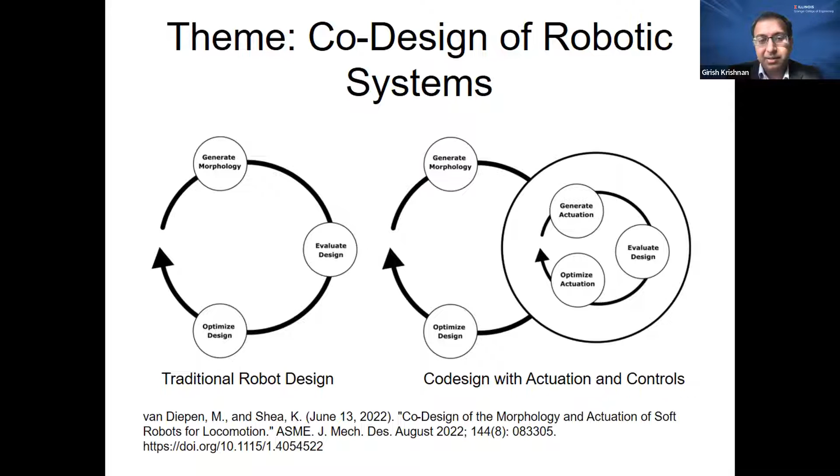Thank you, Girish. So we have four presentations, based on papers published in the 2022 and 2023 issues of JMD. The first presentation is on the novel design of a rotation center auto-matched ankle rehabilitation exoskeleton.

With decoupled control capacity, presented by Dr. Tan Wang. Dr. Wang received his BSc and MSc from China and his PhD from King's College London. In fact, he just completed his PhD very recently, so congratulations, Dr. Wang. His research interests include rehabilitation robots, reconfigurable mechanisms, and multi-finger dexterous robotic hands.

Thank you for the introduction of my background, Professor Leila. Then I will introduce my work. First I will share my screen.

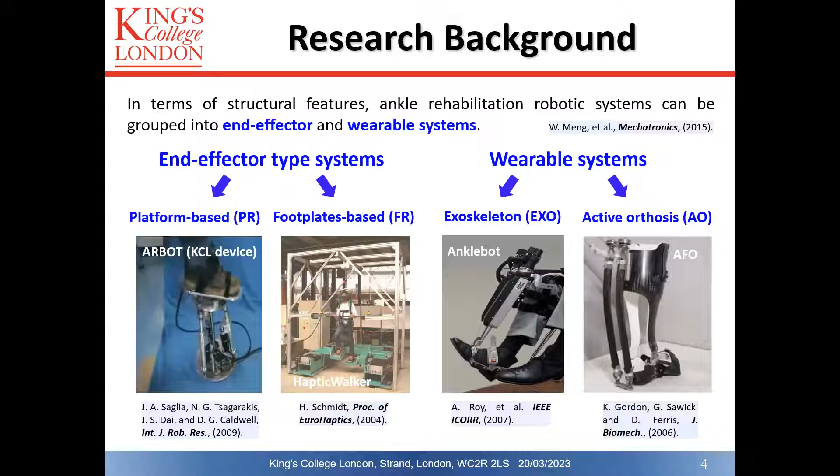These mechanisms are developed for different rehabilitation phases, which mainly include preliminary or early, intermediate, and advanced functional rehabilitation stages. In the initial phase, passive and active exercises are needed to promote patients to restore ROM and strengthen weakened muscles. Proprioception or intermediate exercises initiate after patients achieve a certain weight support capacity and aim to help them recover balance and posture control. The two stages share a common feature: they can be completed where patients are resting in a fixed position, which does not entail locomotion. Therefore, the two phases can be defined as a stationary rehabilitation stage. Comparatively, the advanced stage focuses on maintaining balance by controlling the ankle torques during walking and assisting patients to gradually regain and improve independent walking abilities. Hence, this stage can be defined as a dynamic rehabilitation stage.

Our initial target is to design a reconfigurable ankle rehabilitation device that can provide both stationary and dynamic rehabilitation exercises. We have published the design details in this paper. Today, the paper I will introduce is mainly about an analysis of the dynamic rehabilitation configuration of this reconfigurable design.

In designing such an ankle rehabilitation device, the mechanism center is required to match that of the ankle-foot complex, since misalignment may lead to discomfort, pain, or even secondary injury to the biological joint. Conventionally, in existing designs, the ankle-foot complex is usually reduced as a two-axis rotation model or a 3-axis rotation model. The 2-axis rotation model is adapted from the skeletal structure of the ankle-foot complex and comprises 2 serial revolute joints. However, because of individual differences, it is not possible to provide a unified 2-axis rotation model.

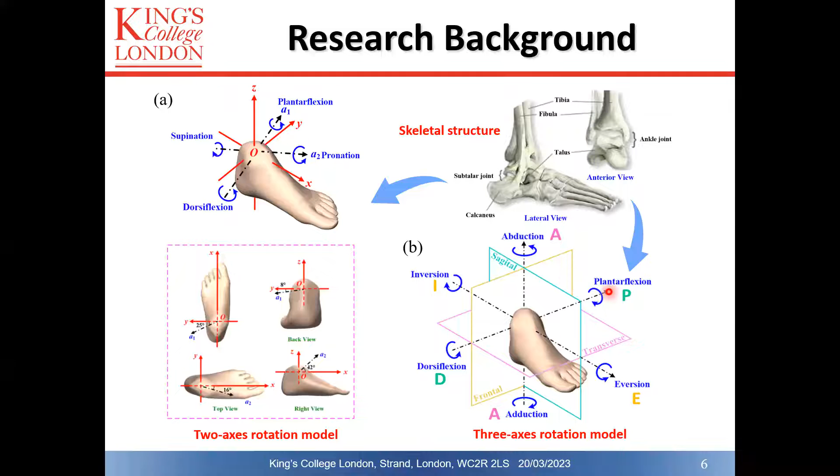In comparison, the 3-axis model is proposed based on motion features of the ankle-foot complex. It is virtually a spherical joint and can describe 3 rotations of the ankle, which are DP, IE, and AA. It is also the model I adopt in the design.

This slide shows the architecture of the design. Apart from the brace and the foot plate, it comprises 2 drive links, L1 and L2, which respectively have a UPU and SPU configuration. In the basic geometry, Ai here represents the connection points of the brace and the actuators. The lower connection points of the 2 actuator links to the foot plate are marked Bi. Point O here represents the ankle-foot complex.

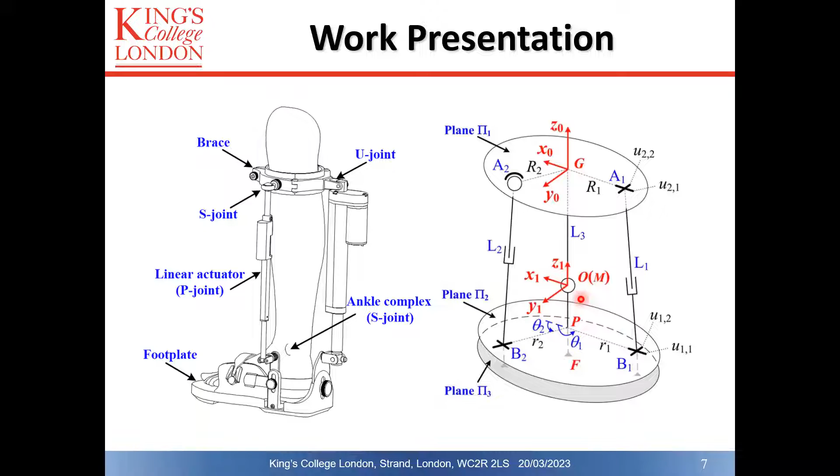Then, for an arbitrary configuration of the mechanism, we can derive constraint screw systems of link L1 and L3. Through reciprocal calculations, we can further get the foot plate's motion screws. Then the motion features of the mechanism can be summarized.

Firstly, the mechanism's rotation axis passes through the complex center. Secondly, in poses where U11 and U21 here - this is U11 and here is U21. When the 2 axes have an intersection, we can determine 2 rotation axes, A1 and A2. As shown in this figure, A1 is coincident with the line CO, and A2 is a normal of plane A1, B1, PG.

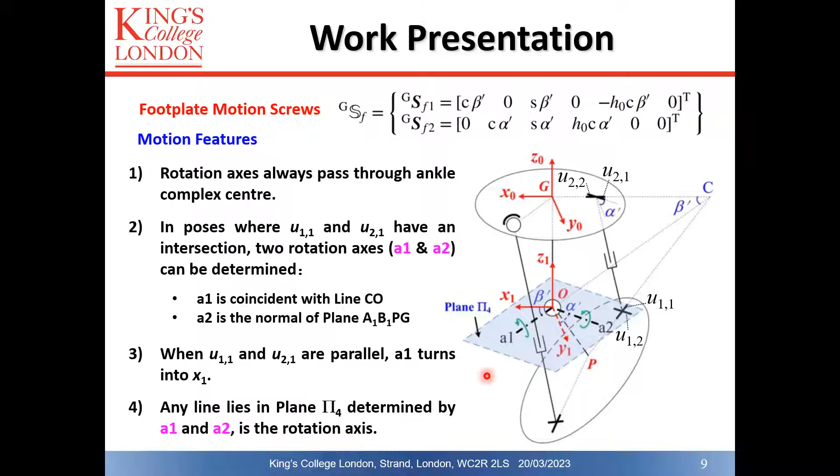In another case, when U11 and U21 are parallel, A1 will turn into X1. In addition, we can conclude that any line in plane Pi4, determined by A1 and A2, is a rotation axis of this mechanism.

Then, based on the analysis above, we can determine the rotation matrix of the mechanism. In this expression, alpha and beta respectively represent the rotation angle about X1 and A2. In the expression, alpha-prime here is the unknown quantity, which can be further determined from the forward analysis of the mechanism.

As shown in these figures, 2 different cases can be classified. In case 1, Bi are not at the same height as O, and in case 2, Bi are at the same height as O. After analysis, we can get the specific expression of alpha-prime in different cases. This formula shows the specific expressions.

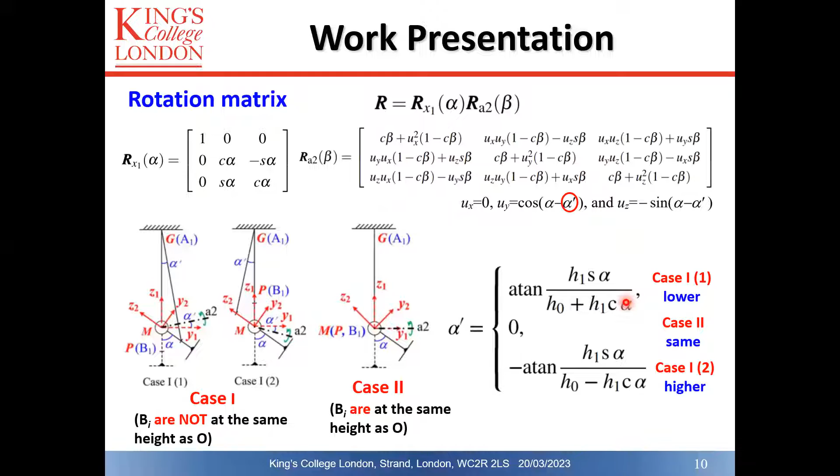After we determine the rotation matrix, the rotation of the foot plate can also be described by Euler angles about axes of the global frame, which are denoted alpha0, beta0, and gamma0. These 3 angles also indicate the IE, DP, and AA motions respectively. Then we can find the relations between alpha, beta, and alpha0, beta0, gamma0. The specific relations are displayed here.

Further, we can find that in case 1, if alpha and beta are non-zero, the mechanism will generate a compound AA motion, which means that gamma0 in these cases will not be 0. Also, the larger the value of H1, the larger the maximum value of gamma0.

As a comparison, case 2 will not generate the composed AA motion, no matter how alpha and beta change, and in this case alpha equals alpha 0, beta equals beta 0. Existing investigations show that AA motion has marginal contributions to gait rehabilitation, although the maximum values of gamma 0 in case 1 are not large. So case 2 is more suitable for dynamic rehabilitation. Therefore, the following analysis will focus on case 2 to fully illustrate its superior performance in other aspects.

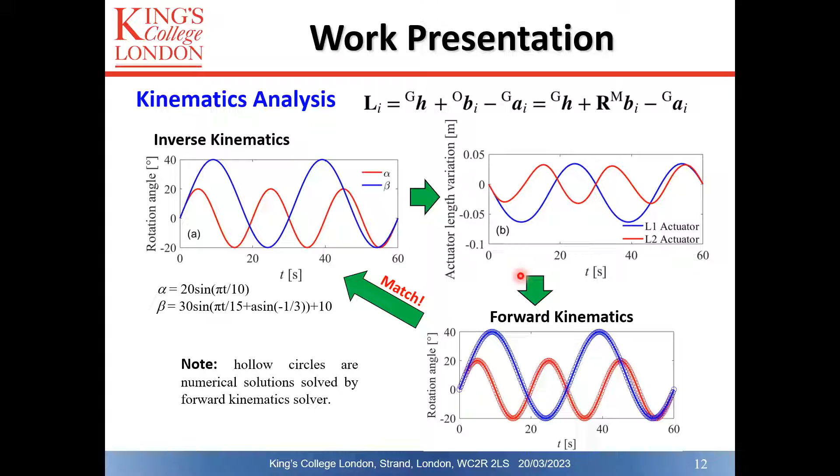In addition, via kinematics analysis, we can also find that the mechanism has a decoupled control capacity. From this animation, we can see this feature. The IE motion can be individually controlled by this link, L2. For individual DP motion, it can be individually controlled by the L1 link. So this animation shows its decoupled control capacity.

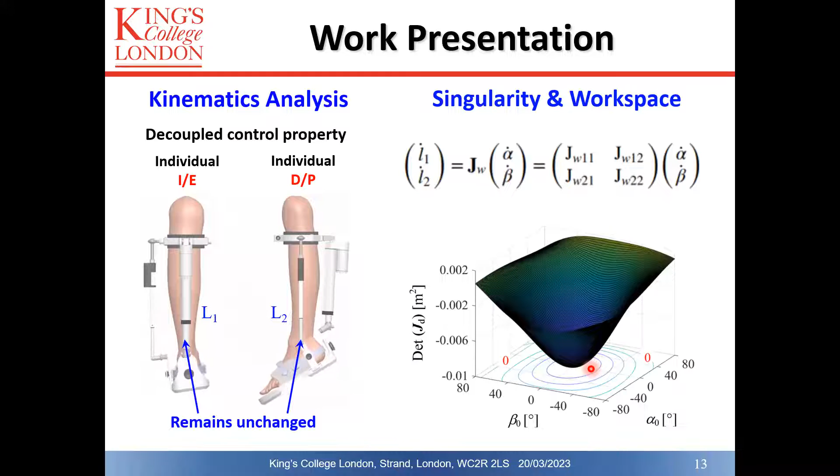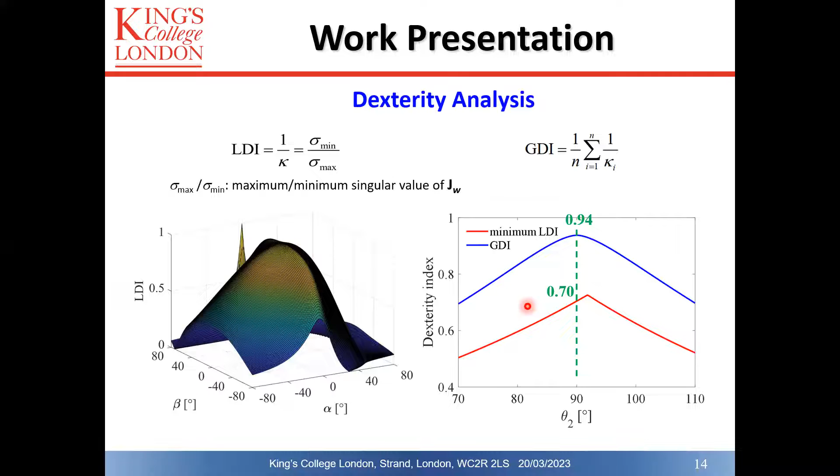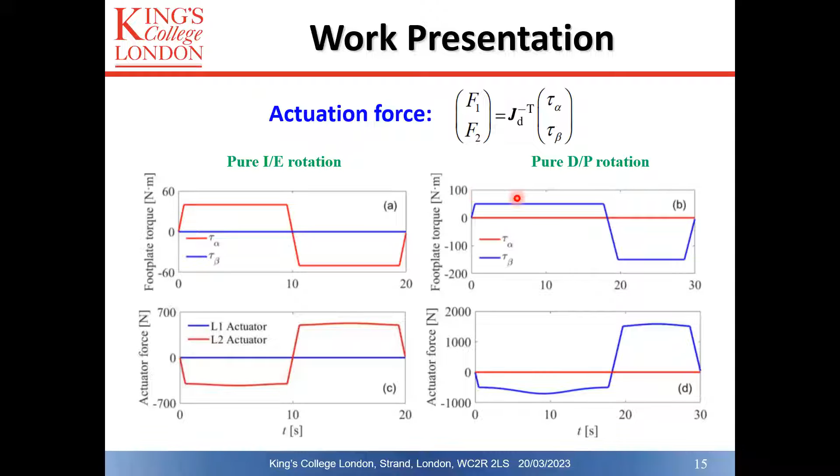Then we evaluated the actuation requirements. First, the actuation force, which can be calculated via this equation. In the calculations, to obtain a conservative estimate, extreme cases are considered, where the ankle torques are most consistently kept as boundary values. Then the actuation velocity can be evaluated by this equation. Based on the aforementioned analysis, it is possible to find suitable commercial actuators that can potentially be used to construct the exoskeleton.

The exoskeleton's adaptability is investigated subsequently. For patients with smaller feet, small size actuators are needed to ensure wearing safety and comfort. The left figures shown in this slide demonstrate that the design is still able to achieve the prescribed realm after reducing actuator stroke length, although the achievable workspace shrinks.

Besides, we investigated the influence of the actuator screw's maximum retractable distance on the device's performance. As shown in the right figures, it turns out that the shorter the stroke, the smaller the adjustable range of the retractable distance. But the range can be improved by decreasing the geometrical parameter Ri.

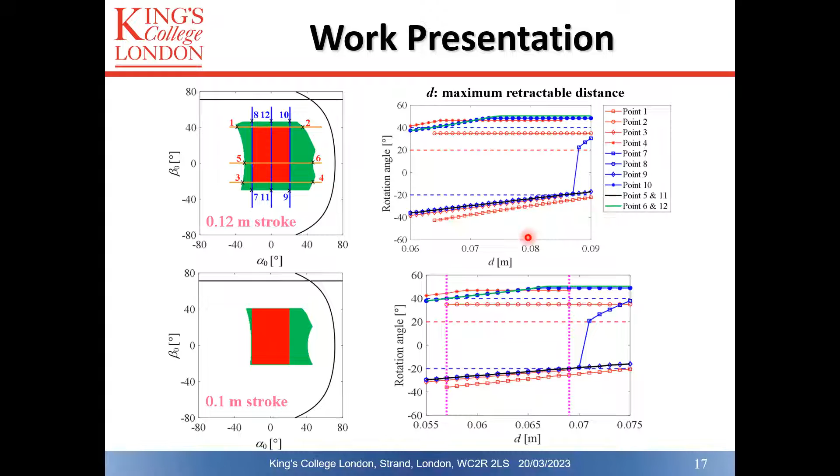Then are the conclusions about this paper. First, the proposed novel rehabilitation exoskeleton has a UPU and SPU architecture, which is capable of automatically matching its own rotation center with that of the ankle foot complex when it is worn.

Secondly, the two-DOF mechanism can provide two rotation patterns. Case 1 is able to provide a coupled AA motion, while case 2 only preserves two primary motions during dynamic exercises, which are IE and DP.

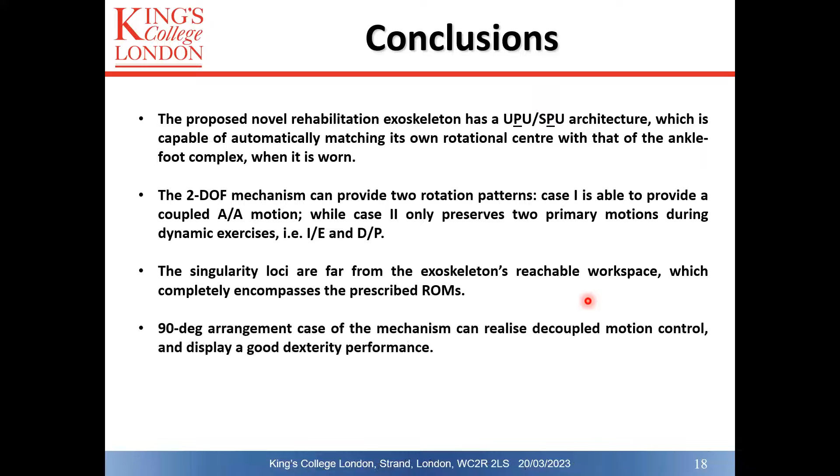Thirdly, the singularity loci are far away from the exoskeleton's reachable workspace, which completely encompasses the prescribed ROMs. Last but not least, the 90-degree arrangement case of the mechanism can realize decoupled motion control and display good dexterity performance. Further analysis on actuator requirements and applicational adaptability shows that the proposed design is manufacturable and suitable for patients of a wide range of heights and weights.

Okay, this is the end of my presentation. Thank you.

Leila, you're muted.

Thank you, Girish. Thank you, Dr. Wang. We will have the question and answers. It was a very interesting presentation and work. We will have the question and answer period at the end after all four presentations.

So I will quickly share my screen. Okay.

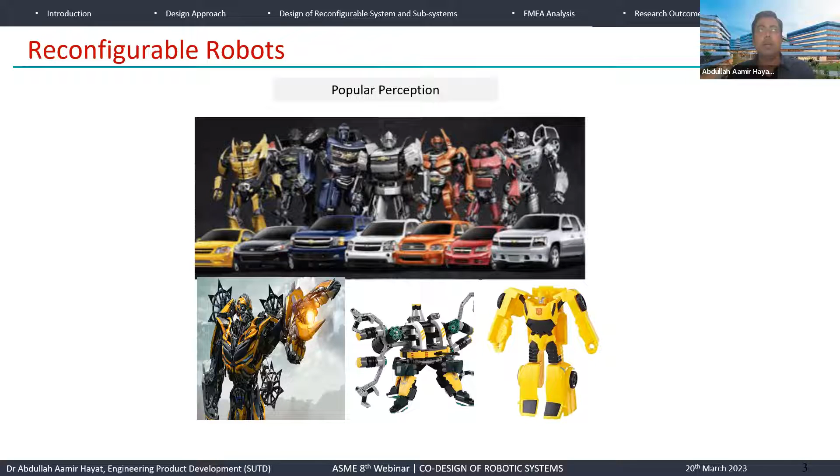This is the accepted paper, and we start with reconfigurable robots. The popular perception of reconfigurable robots generally comes from Transformer movies, as well as toys that are reconfigurable in nature, able to change shape and perform multifunctional locomotion and functionality at the same time.

In the domain of robotics, this is gaining active research attention, for applications like accessing narrow passages. Initially, reconfigurable robot design was more focused on mechanism development and control. Now it's also more focused on application, looking at reconfigurable drones as well as floating water robots that are also reconfigurable in nature.

Our group at SUTD mainly focuses on developing applications centered around cleaning and maintenance. These are some of the robots developed in our ROAR lab under the guidance of Prof. Mohan. This is H-Tetro, which can change its shape into 7 forms. This is the staircase climbing robot, referred to as Tetro. These are robots for vertical glass facade cleaning, which can traverse over positive obstacles like aluminum glass panels. Then this is Scorpio, which has the capability to crawl, roll, and climb walls as well.

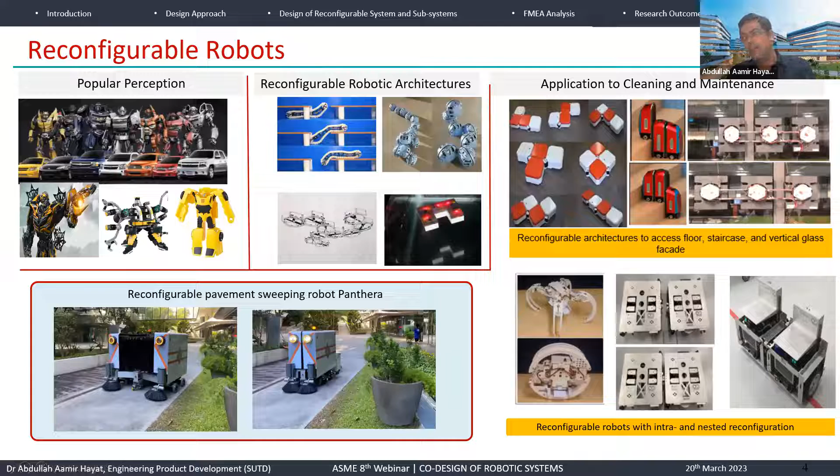These are some modular mobile-based robots capable of joining, connecting, and disconnecting—also like nested reconfiguration. Today, our focus will mostly be on the development of this reconfigurable robot, which we designed for pavement sweeping tasks. This is a system aimed at sweeping, but it also contains several subsystems.

In summary, a reconfigurable robot can be referred to as having multi-ability, like evolution and survivability, possessing the ability to autonomously change shape and adapt optimally to a specific task or environment. In one of our works, we defined and classified a taxonomy of these robots, where the intra, inter, and nested reconfigurability concepts are presented. Intra is one robot that can change its shape into several forms.

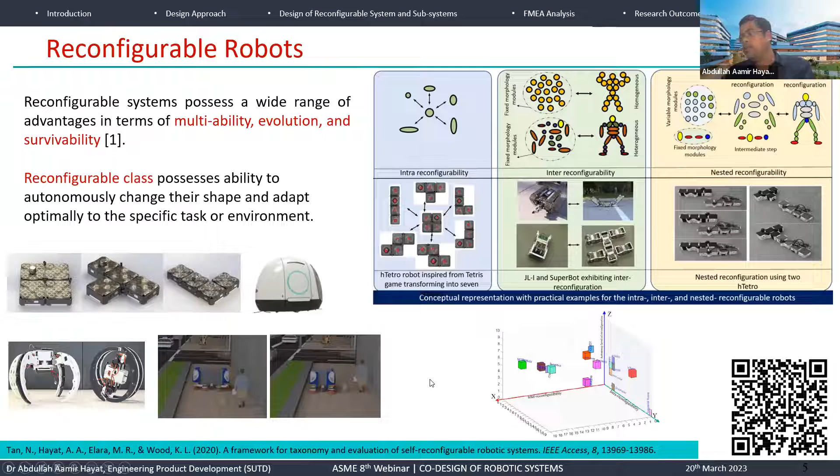Intra is one robot where it can change its shape into several forms. Inter is two or more robots combining together. Nested is a combination of both, where the advantages of both worlds are taken—so two intra-robots joining together results in a nested reconfiguration. This paper can be referenced at this link.

Moving on to the design approach—typically it's inspired from the 4D double diamond: discover, define, develop, and deliver. But in context of reconfigurable robots, our group is actively involved in designing several of these architectures.

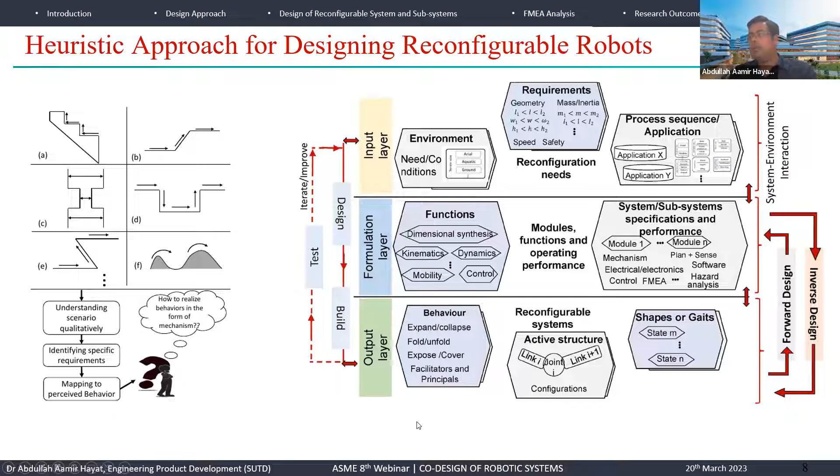Designing robots starts from actuators, and nowadays a more coherent approach to design is taking place. Typically, we can first do analysis and simulation, and then develop the robot, or we first develop the robot and then develop the formulation layer. So vice versa, it results in forward and inverse design.

So the first layer, the input layer, is generally concerned with the environmental requirements and the process and sequence of application that will be required.

Today my talk is mostly focused on designing a pavement sweeping robot. We looked at different conditions of pavements that exist specifically in Singapore context. We can see there are wide pavements, sharp turns with some bumps, irregular surfaces, sharp changes and corners, and the objective of these robots is to enhance the area coverage task.

Looking at this, we laid down the requirements and environmental conditions. Based on this, we set the process sequence for our robot design, starting with a proof of concept in the form of animation, which shows the robot should adjust itself to different pavement widths, and also allow commuters or pedestrians to move where it can shrink and allow the pedestrian without hindrance.

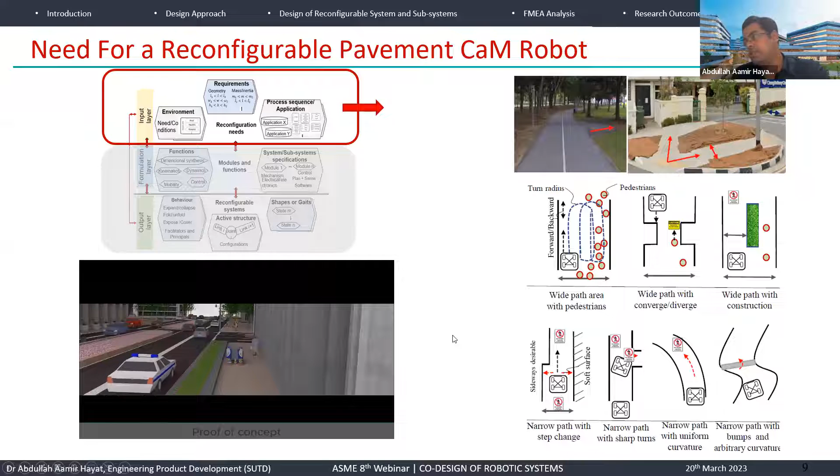Moving on, talking about the heuristic approach we take: first we gather detailed information in the input layer about the requirement, and as shown in the animation, we decided to have a robotic system which can expand and collapse.

So we look at the behavior layer, which is mostly like an output we can observe. A detailed work on transformation design principles was presented long back in 2009 by a researcher, which is a fundamental work suggesting design principles and facilitators.

We adapted that work in the context of designing reconfigurable robots, to see how it can be used efficiently. In that work, the authors proposed principles and facilitators, and we tried to map it with the reconfigurable robotic system.

So what are these? Just to show with animation: expand and the principle. It consists of three principles - expand/collapse, expose/cover, and fuse/divide - shown with the help of animation, taken from the Google animation source.

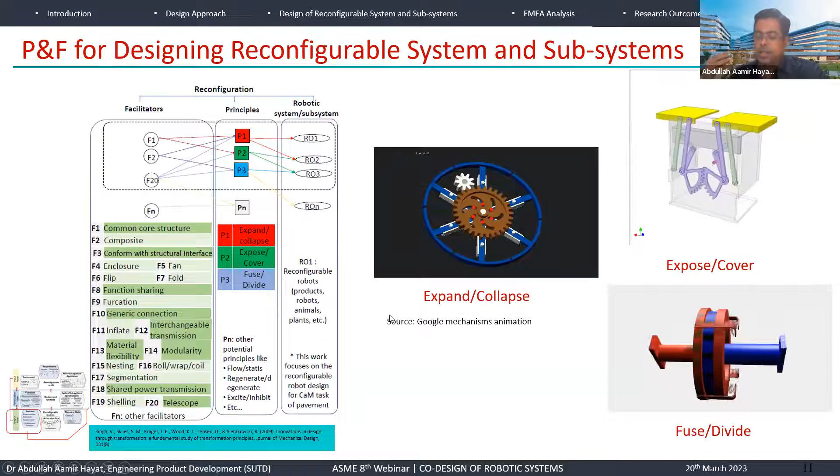So these are by and large the principles suggested in this work. Moving further, there are facilitators which assist in achieving these principles. Altogether 20 facilitators are listed. Basically this work can be seen as a trail which helps designers to aggregate.

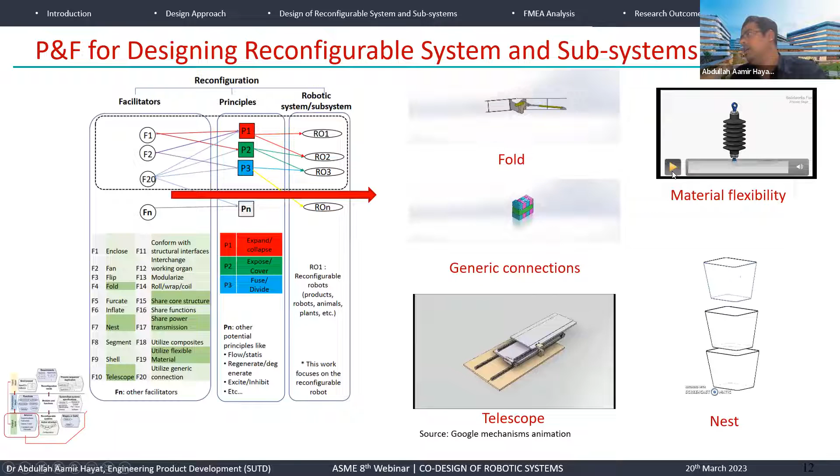Similarly, these facilitators and principles are generic in nature. They can be applied to products as well as reconfigurable robots. Our study mainly focused on reconfigurable robots that can be designed using these principles and facilitators. Looking at these, some examples show generic connections, fold, material flexibility, and nesting. Altogether there are 20 facilitators listed.

We have illustrated in our work how it can be used, focusing on design of reconfigurable systems and subsystems. For designing a typical pavement sweeper, it consists of transmission - that is a locomotion unit - which should have a varying footprint, then outer cover, storage bin, surface cleaning mechanism, and vacuum suction blowing unit. These are by and large the subsystems required for any typical sweeper robot.

So we expanded on this - the transmission needs to expand and collapse. These are the requirements listed, and the corresponding principle and facilitators that assisted in designing these systems are listed here: P1, then fold, modularity, function sharing, and shared power transmission.

How it looks is basically these are the steering units which also assist in locomotion. Each unit is a differential drive locomotion unit, which helps in steering as well as locomotion.

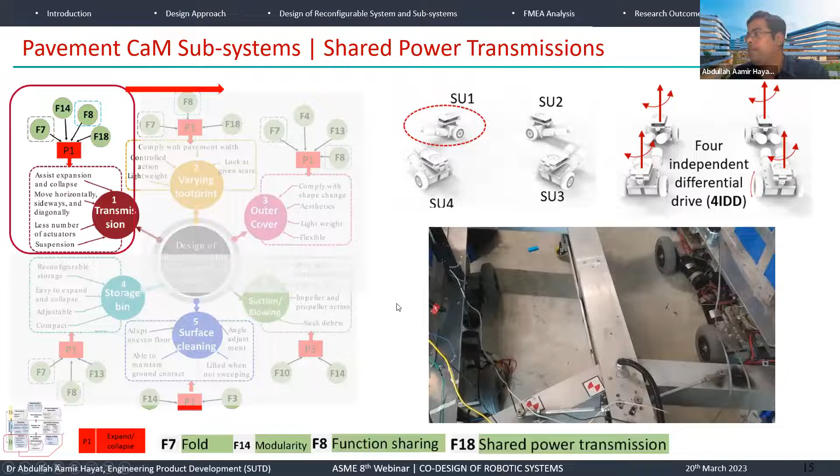Moving on further, we conceptualize having a varying footprint, and the principle involved is again expand and collapse. The facilitators that help us in designing this are fold, function sharing, and shared power and transmission. With the help of video, one can see these lead screws are used in support with these steering wheels.

Once it shrinks, it will be assisted by the force transmitted through these wheels in the direction it is reconfiguring. So it's a right-handed lead screw and left-handed lead screw, just a single degree of freedom resulting in expand and collapse here.

So it's also being highlighted as a shared power transmission because multiple steering units are being used to gain this expand and collapse once the system is grounded, which I'll be highlighting in the coming slides.

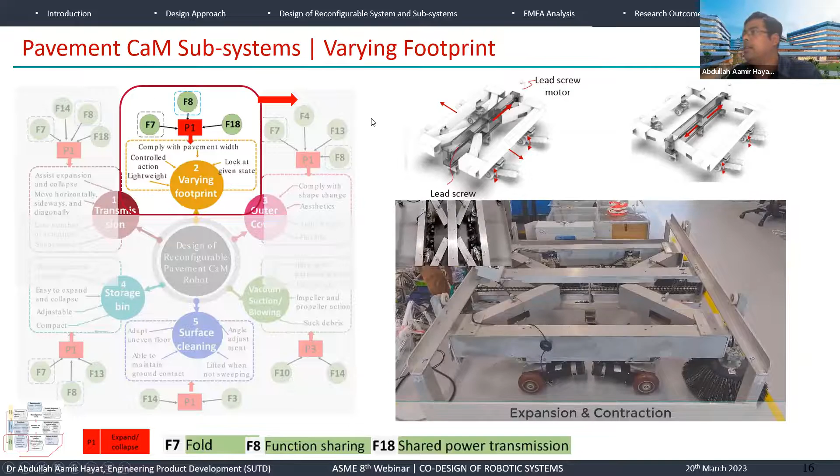Then it requires an outer cover, which also needs to complement the principles of expand and collapse. The facilitators we have selected are fold, function sharing, material flexibility, and enclosure, because the requirements are lightweight and flexibility - those keywords resulted in selecting these facilitators.

And as you can see, we use something similar to a bellows mechanism for this expand-collapse feature for the cover.

Similarly, the sweeping brush is an essential subsystem required for surface cleaning. The requirements are listed, and the principle again is expand and collapse, facilitated by modularity and conforming with the structure interface, because the sweeping unit should attach itself to the surface while cleaning. We can also adjust the force required for the sweeper while cleaning a given surface. This is a subsystem of this cleaning and maintenance robot named Panthera.

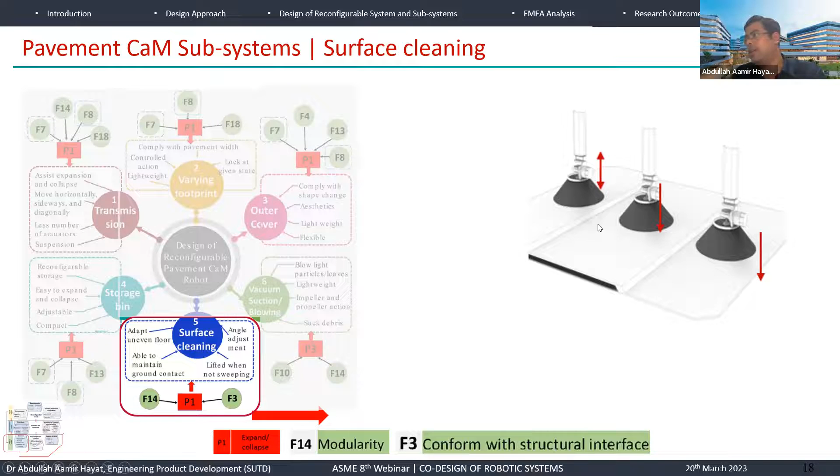Similarly, we looked at two other units which are at concept stage: a blower and suction unit with the same mechanism, and also the storage bin, which should complement the expand and collapse feature. It is also based on the principle of expand and collapse, with the facilitators involved being fold, function sharing, and material flexibility.

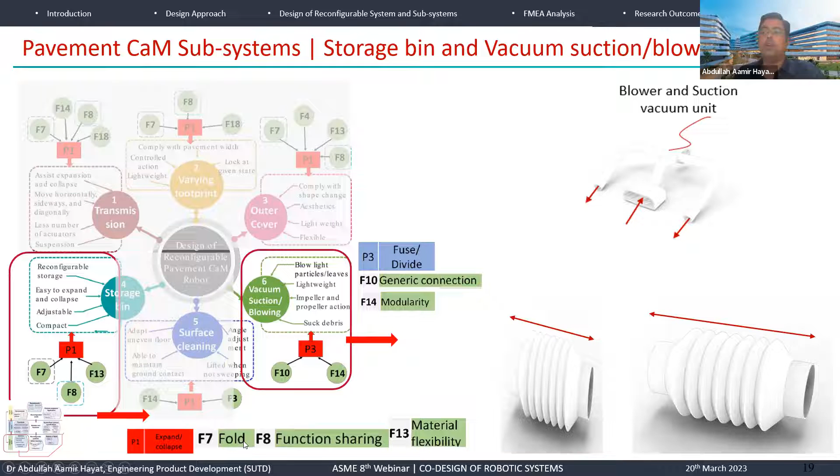Moving on further, we looked at the behavior aspects derived from the requirements and how it resulted in selecting a certain mechanism to achieve that. Now we look at the mechanism layer. Principally for this expand and collapse, this mechanism was used, and it was first presented in a conference.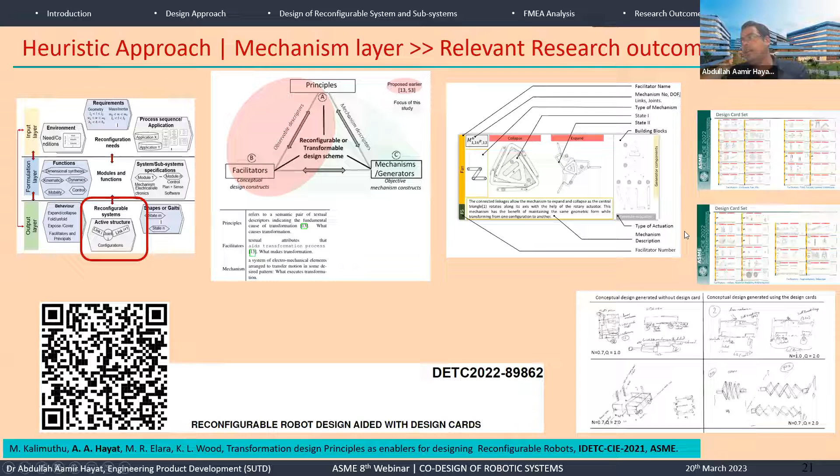Because we are interested in looking at the mechanism layer, slightly deviating from the presentation, one outcome of research we started around 2018-19 resulted in structuring, in a more formal way, how a designer can think and assist using mechanisms. We have work presented at IDETC which lists facilitators supporting mechanisms, helping mechanical engineers, whether freshmen, skilled, or novice, to ideate what mechanism can support behaviors mainly expand, collapse, fuse, divide, and expose and cover. This work can also be referred to.

Coming back to our work, with the development we also look at the shapes and different gaits, because reconfigurable robots have interesting features that provide different gaits according to the requirements, which result in different functionality. This robot can also do static reconfiguration while keeping its space.

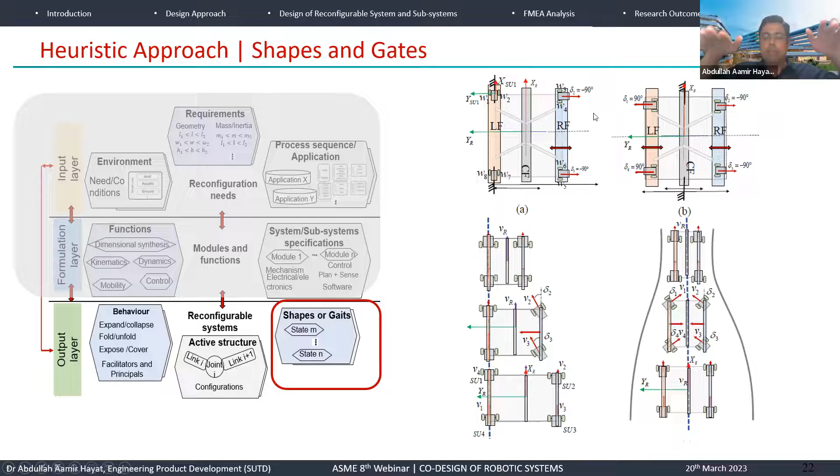It consists of 3 frames, so one of the frames can move left and right, resulting in shrinking on one side, then along the middle frame, and then along the right frame. One interesting feature we have experimentally shown and published is how reconfiguration while locomotion is attained, which is also highlighted in the paper we are presenting today.

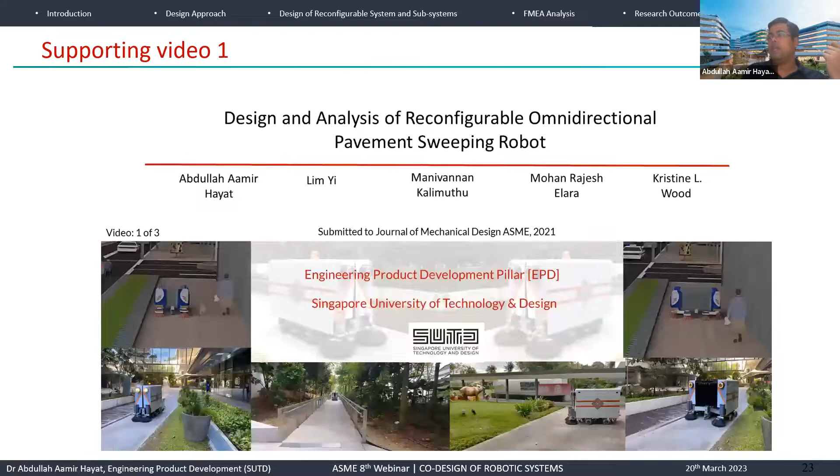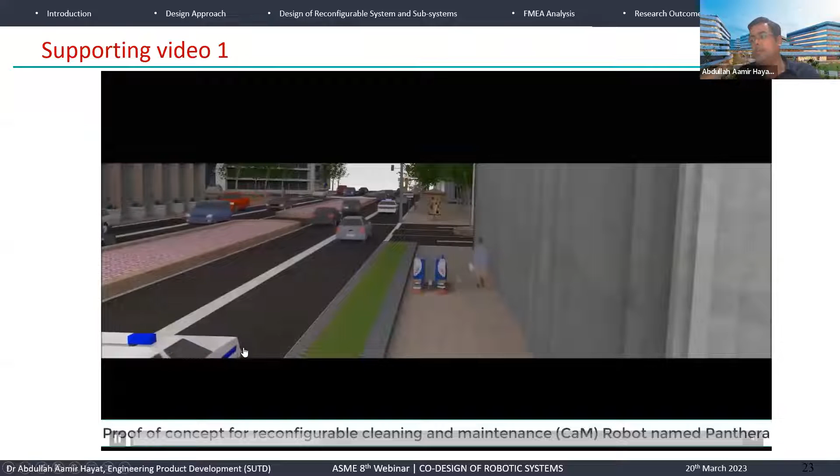Coming to the video, since we have mostly talked about the robot in terms of images, as a proof of concept we start with the animation. Then we looked at different subsystems which support the requirement or behavioral requirement for this robot, like mechanism analysis with a simple single degree of freedom mechanism, and subsystems at the locomotion level, electrical units, and safety and control that go into building this robot.

Moving on further, this framework is one of the main aspects proposed in our work. After development of this robot, we also look at the functions dealing with kinematics, dynamics, control, and mobility. For control, we suggested a cascaded controller for each of the steering mechanisms, because it's uniquely...

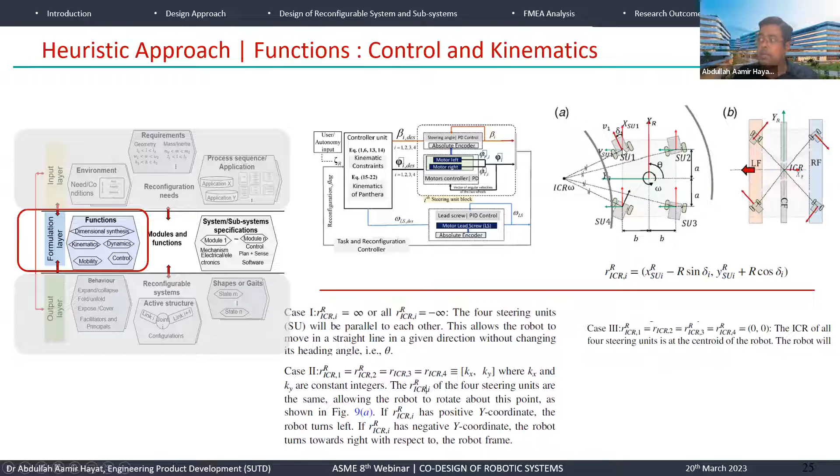It's a mechanism supported by 4 independent steering drives. This results in zero turning radius, and it can attain any arbitrary instantaneous center of rotation, except at the axis of these steering units, because that will result in singularity.

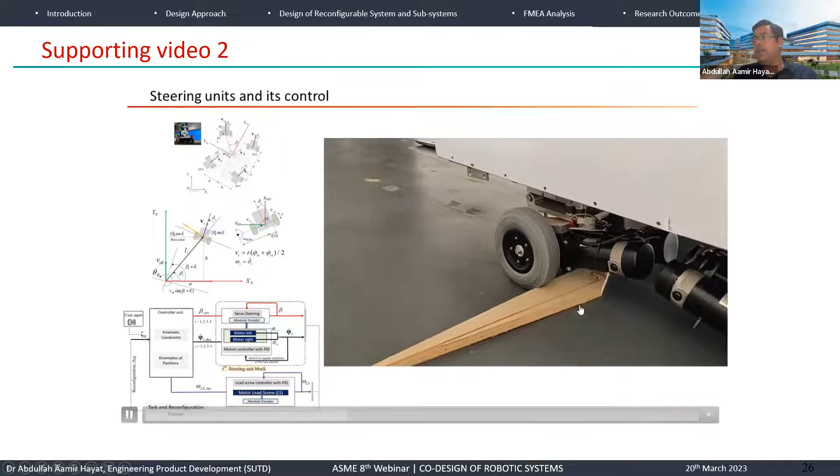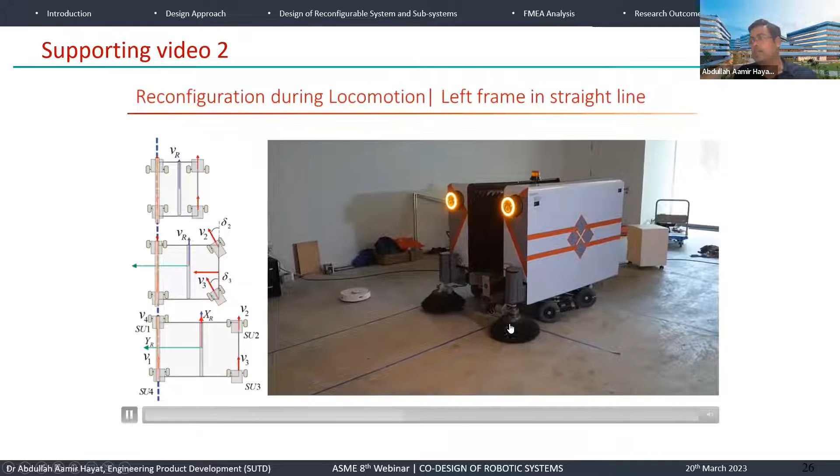Moving on to showcase again with the help of this video, we have tested this ability of the locomotion unit, referred to as reconfiguring while locomotion. One of the frames moves along a straight line, and then this moves towards it. Similarly, the center frame moves along the center line, and then both frames converge towards the central frame. These are the modes of reconfiguration proven experimentally, with some tests in outdoor settings to test the control suggested in the paper.

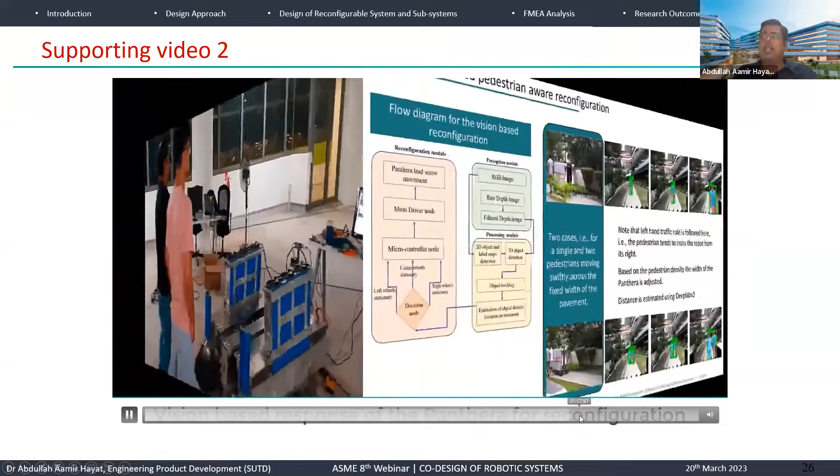Some other nice applications can be developed, like detecting human density and adjusting accordingly. These are the proof of concept demonstrations done during the initial development phase of this robot.

Moving on again further block by block, starting with input layer, then output, then formulation layer. In formulation layer, we have done the kinematics, dynamics, and kinematics and controls. We looked at the mobility, even done the dimensional synthesis. For more model-based control, we also propose some of the work which looks at the dynamics of this robot.

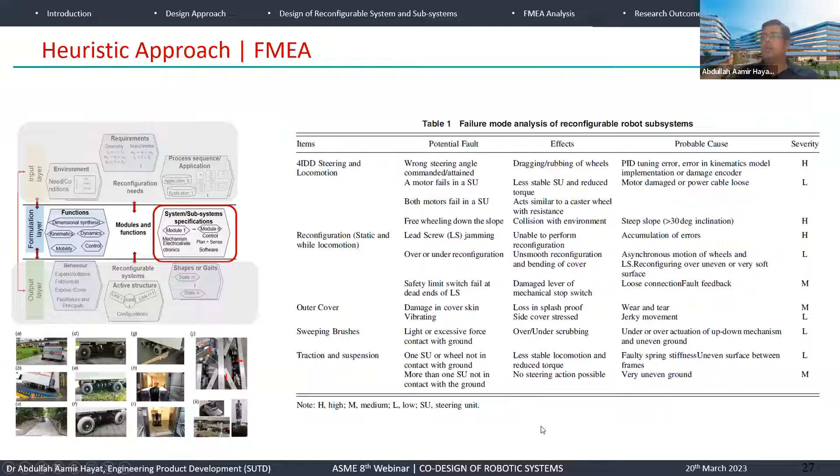Then we performed, once the system is up, several subsystem layer testing under failure mode analysis, failure mode and effect analysis, and these are listed in the tabular format in the paper. One can go into the details by looking at it. Majorly we look at these 5 subsystems, which are the subsystems involved with this robot.

Another outcome of this work is we detail it in the form of another design work, that is iteration in design and development, where we looked at the taxonomy. We defined how iteration is carried out at different phases for a given project, with the help of our funding agency.

Then these are the 3 versions. Currently, we are working on the current version of this for the autonomy test.

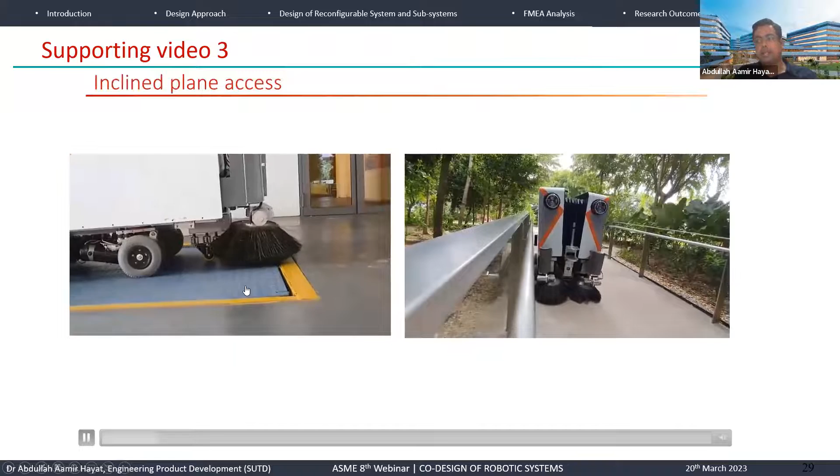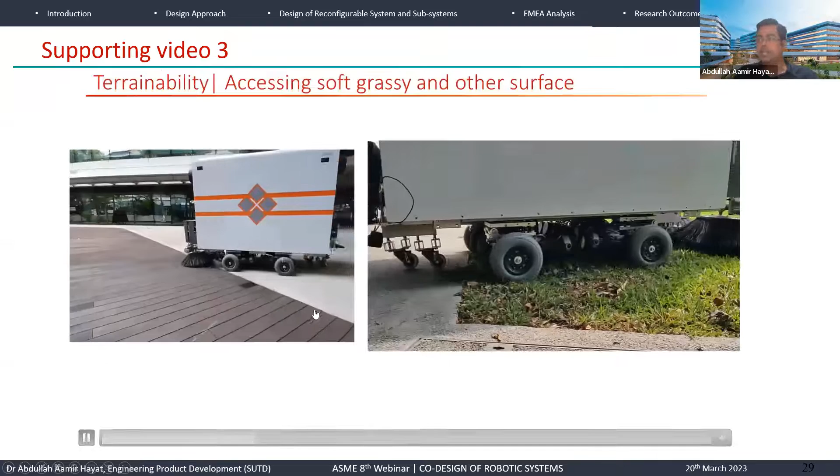So for the failure mode effect analysis, these are several conditions that were used to test it under, say, varying the inclination angle, moving on a fixed inclination angle in our campuses, then different surface conditions like soft surface, then wooden surface. Typically, over here, the grass are not wet.

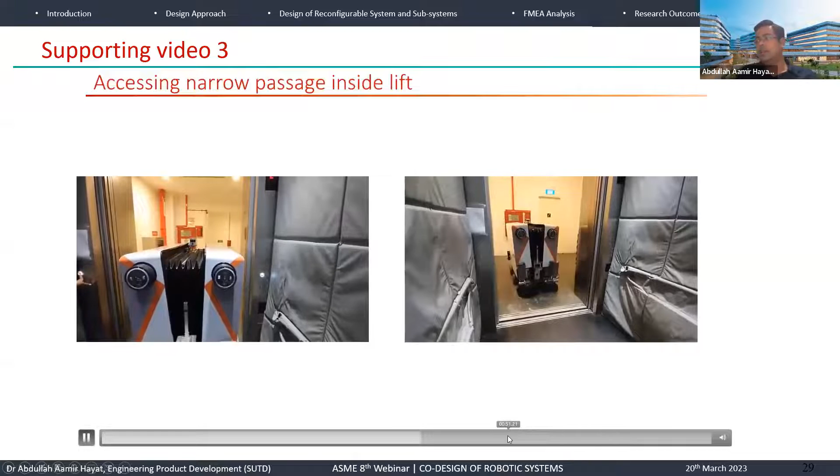So in case of wet condition, we observe the sinking of this wheel, then we decided to increase the diameter as well. The advantage is it can fit to even the lift, loading lift that we have. It can shrink and then take a lift, and then we have tested it in night conditions.

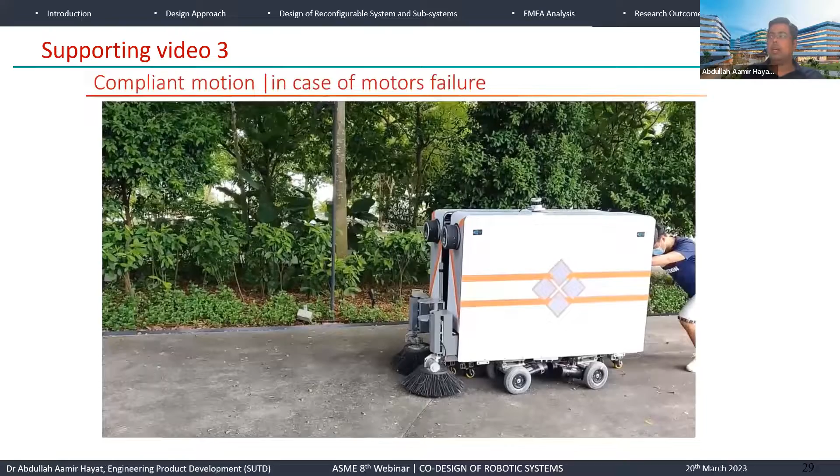So these are several tests which were planned, and it has also a capability that once the robot motors got some problems or limitations, then it can also be pushed by a single person. And these are some of the locomotion capability moving sideways, which will enhance the area coverage.

So with this, I would like to conclude my presentation. Our work uniquely looked at designing a reconfigurable system, evolving the fundamental transformation principles that are expand, collapse, fuse, divide, and expose and cover. We looked at the attributes of designing reconfigurable robots, illustrated with the functional design of the proposed robot, and the framework is more generic in nature. It can be scaled for other reconfigurable robot design, or in general also robot development.

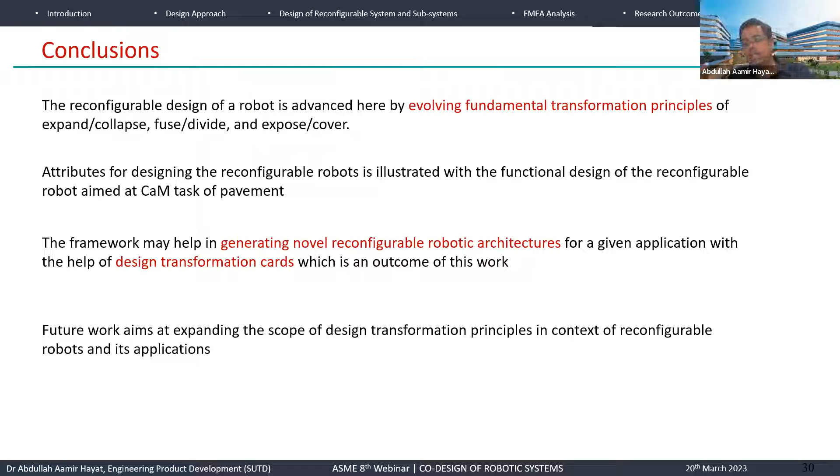Future work aims at expanding our scope of transformation principle in context of other robots as well, and we are actively looking for design science publications, considering ASME as one of our venues.

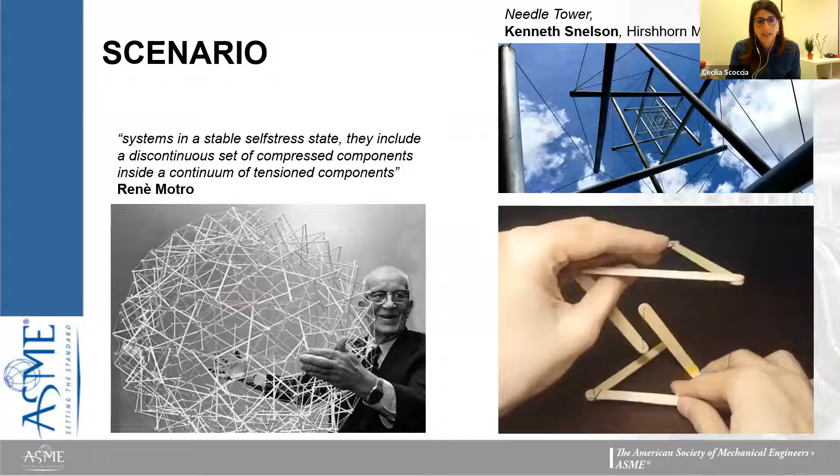The term tensegrity derives from the contraction of the terms tensional and integrity, and it was coined by Richard Buckminster Fuller in 1940. This terminology implies the integrity of a structure in equilibrium with continuous structural elements in tension, the cables, and the discontinuous compressed elements, the struts.

Tensegrity structures are simple and efficient from an engineering point of view, and they maintain functionality with only the smallest possible number of structural components. According to René Motro, these are systems in a stable self-stress state, and they include a discontinuous set of compressed components inside the continuum of tensioned components.

So first, the outline of the presentation will be an introduction to the tensegrity floor. Then we move to the multibody model and the proposal for the mechatronic system. And then we will have a look at the simulation and the experimental results.

The tensegrity floor object of this study is a hybrid glass-metallic structure characterized by a lightweight metallic subframe sustaining a glass floor decking. Thanks to its transparency, the floor fits applications where low impact is required, for example in the case of coverage of archaeological sites.

The main novelty is the introduction of the glass plate as a structural element. Thanks to the designed adhesive joint, the glass is no longer in a simply supported configuration, but it guarantees an actual contribution towards the reduction of the deformation of the system.

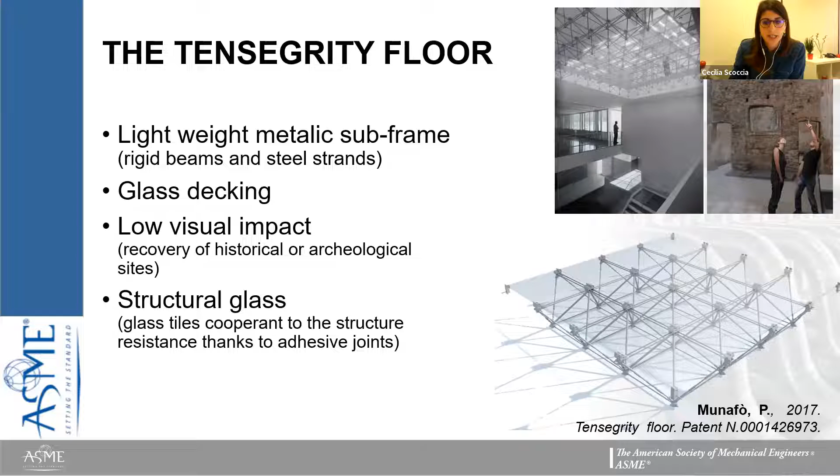At the base of the effectiveness of the tensegrity structure is the correct tensioning of the metal frame, whose purpose is to keep the rigid elements compressed. The tensioning level is responsible for the actual deformation of the structure. Since this kind of structure is subject to significant deformation, a mechatronic servo system is proposed, aimed at maintaining correctly the stress of the metal cables.

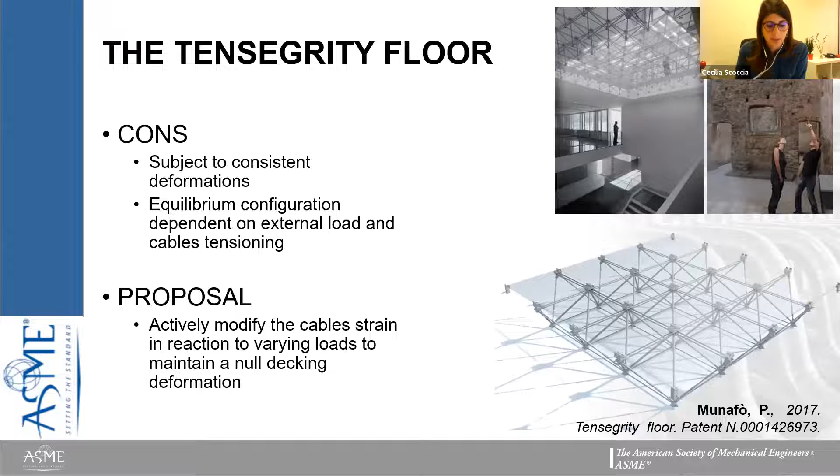The floor is realized by two different levels, and a set of strands is used to connect the upper and the lower level of the structure. A series of rigid beams, which are axially compressed, are diagonally disposed between the upper and the lower level of the structure.

Tensegrity structures are affected by large displacement depending on the internal stress of the strands, due to the kinematics of the system. In order to investigate the behavior of the floor, the structure is modeled in a multibody environment.

So a hybrid rigid-elastic approach is used. In particular, with the exception of the metal cables—the upper, lower, and lateral strands—all the bodies are considered rigid.

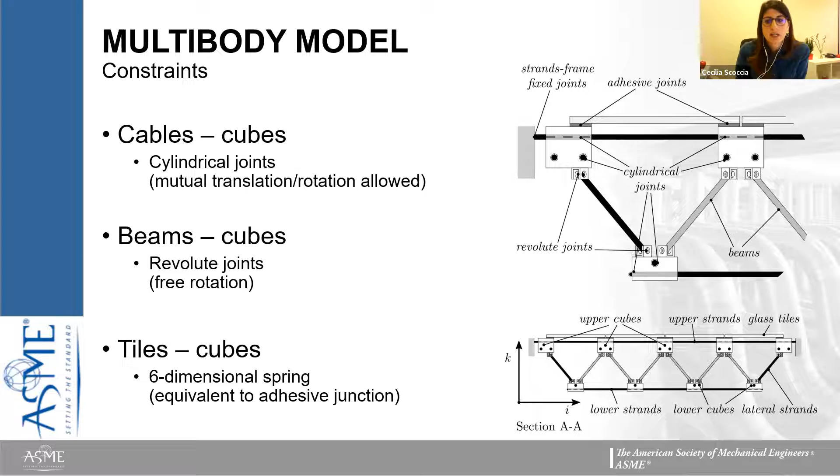The connections among the cubes and the strands are allowed by holes on the faces of the cubes, through which the cables are inserted. Thanks to this connection, each cube can both rotate around and translate along the axis of the cable, realizing a cylindrical joint. The glass tiles on the upper surface are connected to the subframe by adhesive joints.

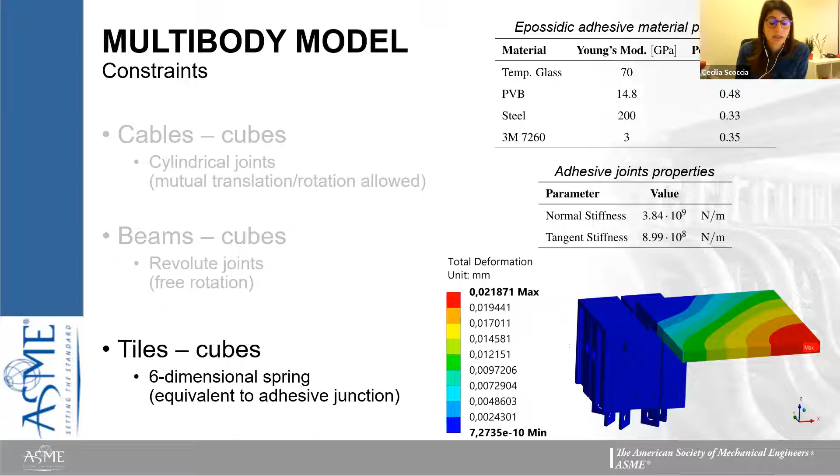In particular, each glass tile is connected to 4 different cubes by means of adhesive joints, realized with structural epoxy resin. The multibody model is modeled as an equivalent set of concentrated 6-degrees-of-freedom elastic elements, and a finite element analysis was used to determine the stiffness of the adhesive joint.

Since this kind of structure is subject to significant deformation, based on the results obtained by simulation, a mechatronic system for the servo actuation of the structure is proposed. The principle is to vary the tension of the cable to vanish the decking deformation, measuring the vertical inflection.

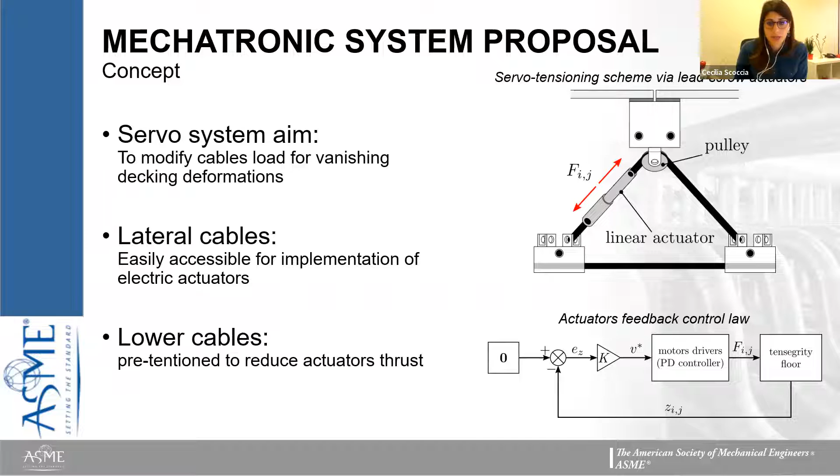In this case, lateral cables are chosen thanks to their easy access for the implementation of electric actuators. A possible solution is providing each couple of lateral strands with a linear actuator able to modify the internal stress. A standard proportional-derivative control loop, which regulates the tension based on the measured displacement, can be implemented also in simulation in order to optimize the control strategy.

So 3 different feedback control schemes of different complexity are investigated in terms of the response to the application of a static load to the upper surface. In the first control scheme, the lateral cables are actuated based on the deformation, and in this case, it's more complex in terms of actuation.

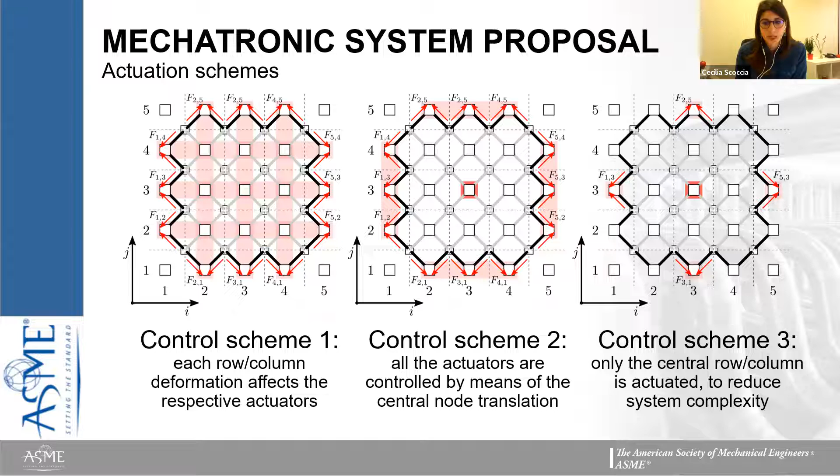In the second, all the actuators are controlled by means of the central node translation. And the third one is a simplified actuation with a reduced number of actuators, so only 1 actuator per edge.

These 3 control schemes have been tested in a simulation environment to observe the response of the structure when we apply an external load to the upper surface of the glass decking. Without control of the lateral strands, the initial strain of the lower cables moves the glass surface upwards. So the better solution is provided by control scheme 1, which is able to vanish the vertical displacement of all nodes, and a complete compensation on the floor is obtained.

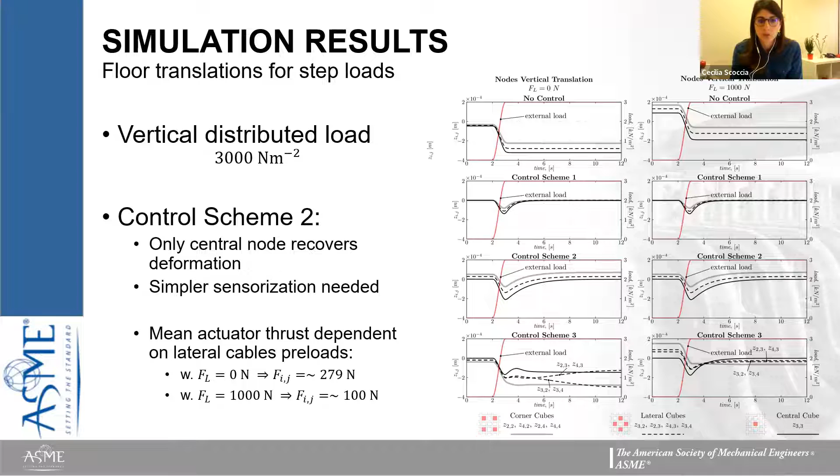In the case of control scheme 2, only the central node recovers the deformation, but at this point it's more convenient to use control scheme 3, with a simplified solution.

The real tests on the tensegrity floor were performed by reproducing the pedestrian load condition. The static load was applied according to the values provided by the Italian technical standard, and the 3 loading conditions are the symmetric load distributed on the central span, the asymmetrical load distributed on the lateral span, and the uniformly distributed load. Each load configuration was applied both in the case of glass panels simply supported on the metal substructure and panels bonded to the substructure by adhesive joint. Also 2 different measurement systems were used and compared in order to measure the displacement.

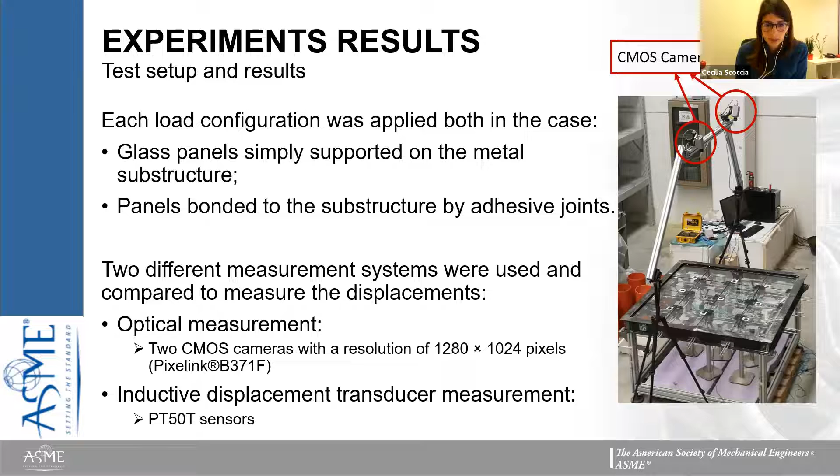In the first case, we used an optical measurement using 2 different cameras with different angulation, as is possible to see from the figure, and an inductive displacement transducer measurement using PT50T sensors.

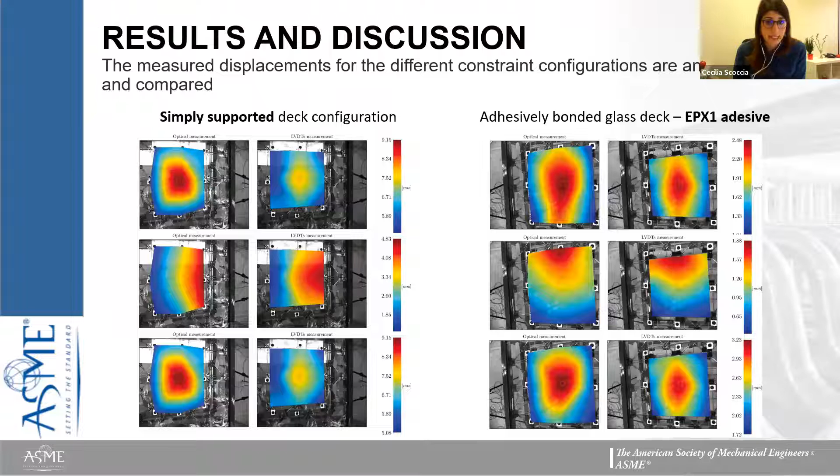a different kind of adhesive, and also in these two other figures, the mapping of another kind of adhesive and with the use of silicone is reported.

The results of these different measurements show the elastic behavior of the resulting hybrid system, and show the effectiveness of the adhesive technology in increasing the overall stiffness of the structural elements compared to a simply supported configuration. So the choice of the adhesive is determined not only by the cost, but also by the mechanical properties.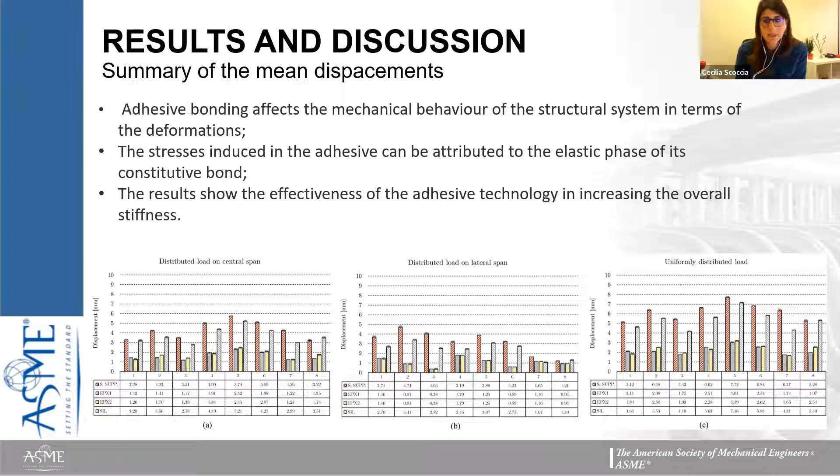At the end, we choose adhesive 2, because nevertheless epoxy resin 1 offers better performance, but it's more expensive and has a lower glass transition temperature.

So in conclusion, in this work we presented a novel glass floor based on the tensegrity principle for a civil engineering application with low weight and low visual impact. We also obtained acceptable deformation maintained by actuation of metal cables.

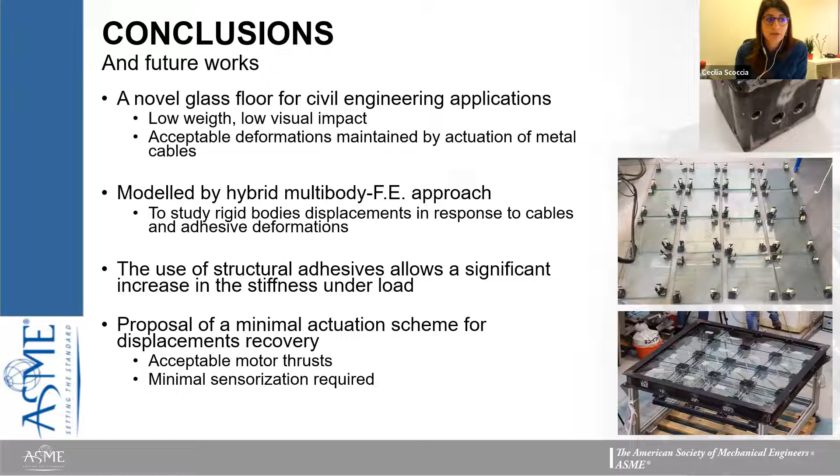We also modeled the entire system using a hybrid multibody approach, and we proposed a minimal actuation scheme, keeping acceptable values for the system. In the end, the use of structural adhesive also allows a significant increase in stiffness under different conditions of load. So thank you for your attention.

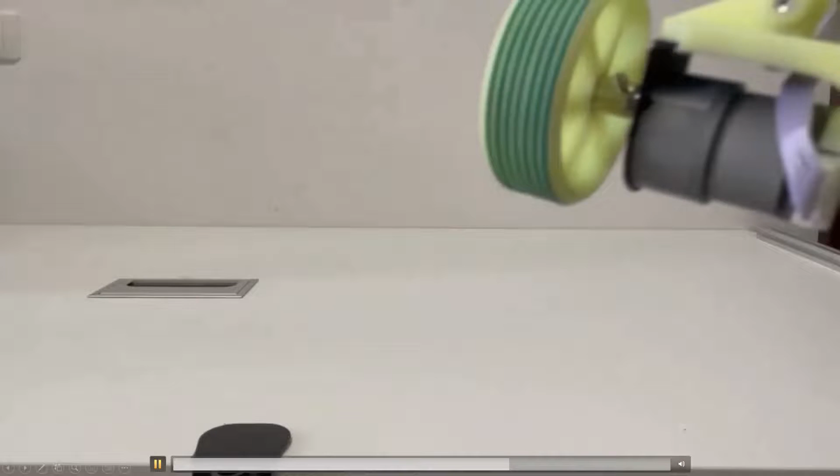Okay, obviously the robot cannot stand up by itself. So at the same time, we are also wondering if the robot can climb the stairs by itself. Let's see the next video.

But the robot also failed to go upstairs. And we're also wondering if the robot can cross the obstacles. Why doesn't it work?

The robot without the configurable mechanism also failed to cross the obstacles.

Next, I will explain how we solve this problem.

At first, we analyze the reason why the robot cannot stand by itself, which is that the robot's moment of inertia is too large, and the driving force of the robot is not enough to make it stand up.

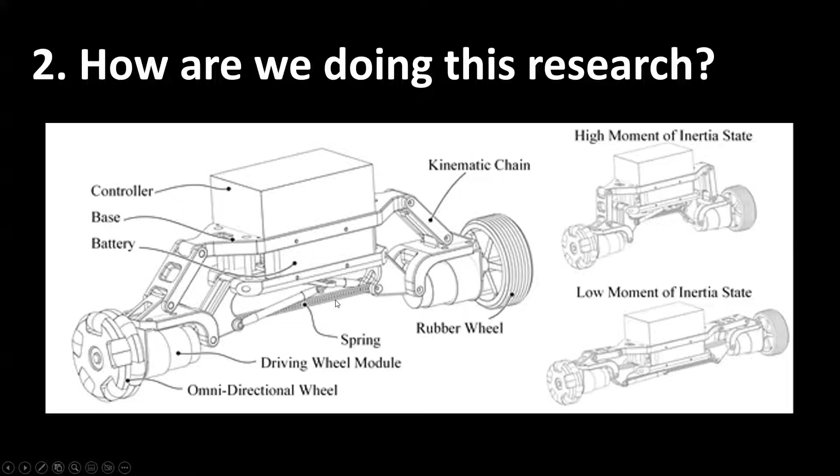Considering that when the robot deploys, a large amount of energy is required to lift the base of the robot, we add a spring here, and the spring can reduce the energy required for the base to lift during the deformation. This is our design plan.

Next, how did we implement this plan? In this paper, we built a virtual equivalent parallel mechanism as the mathematical model of the system.

This model is a coupled model that couples the motion of the mechanism and the steering information. Then we analyze the kinematic and dynamic models of the system.

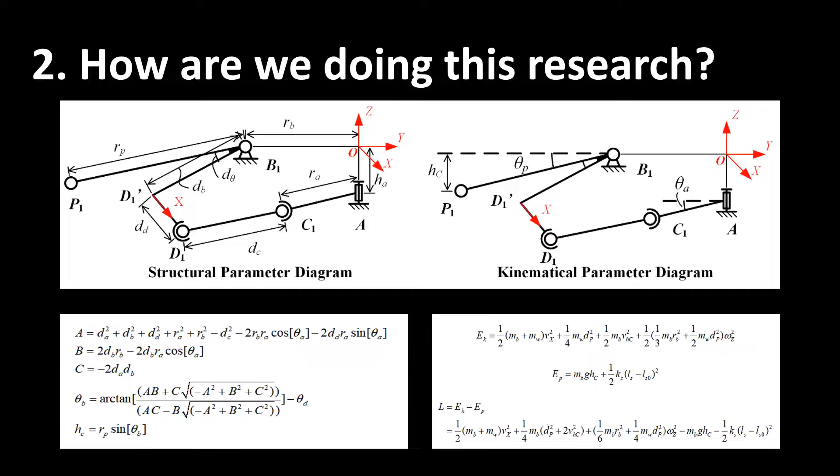Next, beyond the mathematical model, we discussed the stiffness: the driving stiffness and the motion force transmission efficiency, and the driving force and the driving power.

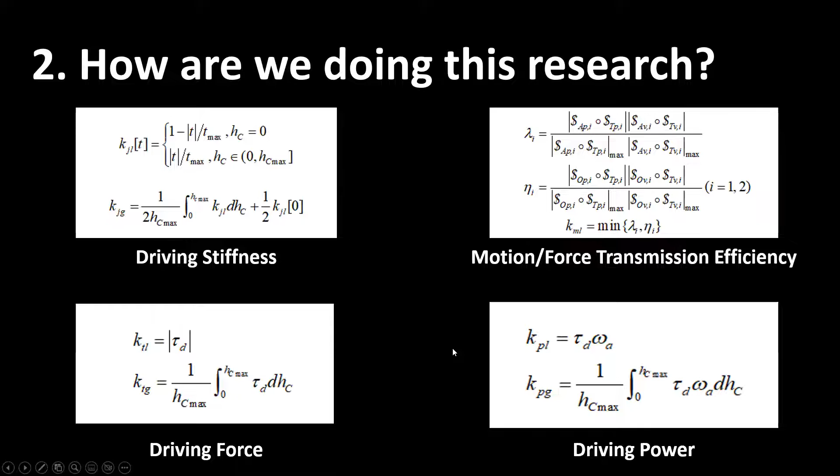Next, to determine the dimensional parameters of the mechanism, we used the particle swarm optimization algorithm to optimize the comprehensive performance of the mechanism. Finally, let's look at our research result.

The first is the performance comparison of the mechanism. In these four figures, the red line UN represents the performance of the unoptimized mechanism, the blue line SO represents the performance of the mechanism optimized step by step, and CO represents the performance of the mechanism optimized comprehensively.

From the result, we can see that the performance of the optimized mechanism is better, and the performance of the CO mechanism is better than the SO.

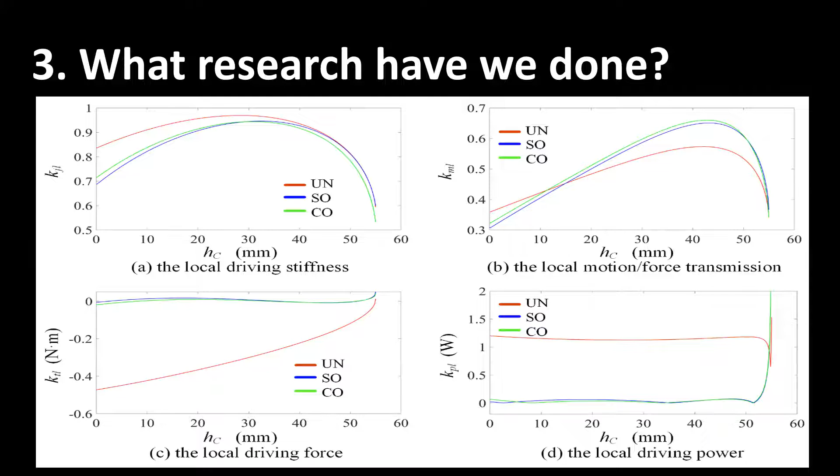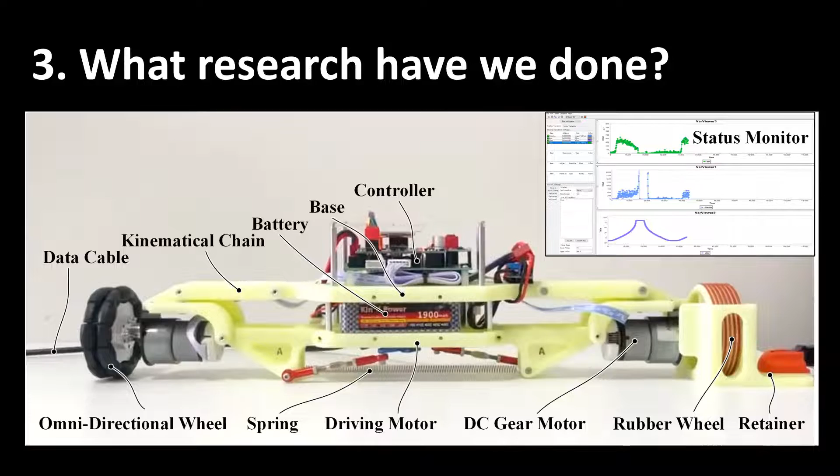Then we built a prototype and conducted the validation experiments. At first, let's see this video. We conduct the experiments on driving force and driving power.

From the experiment results, the spring reduced the driving force and the driving power of the mechanism.

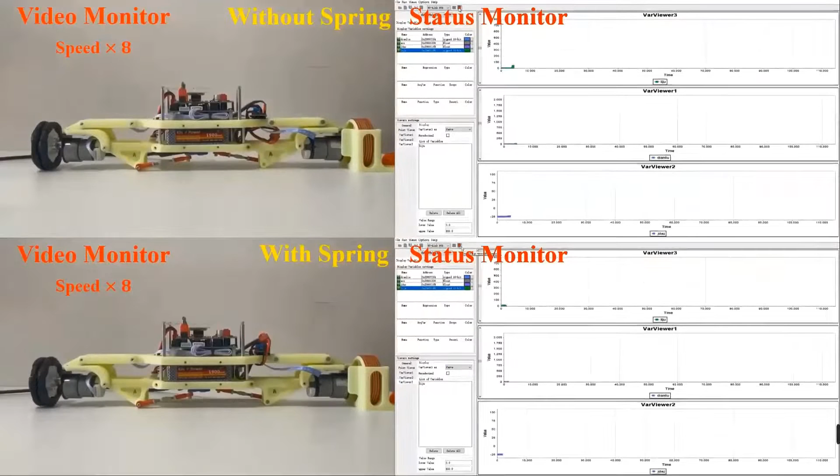Then is the stepwise optimized mechanism. We can find that after the optimization, the driving power and the driving force of the mechanism were further reduced.

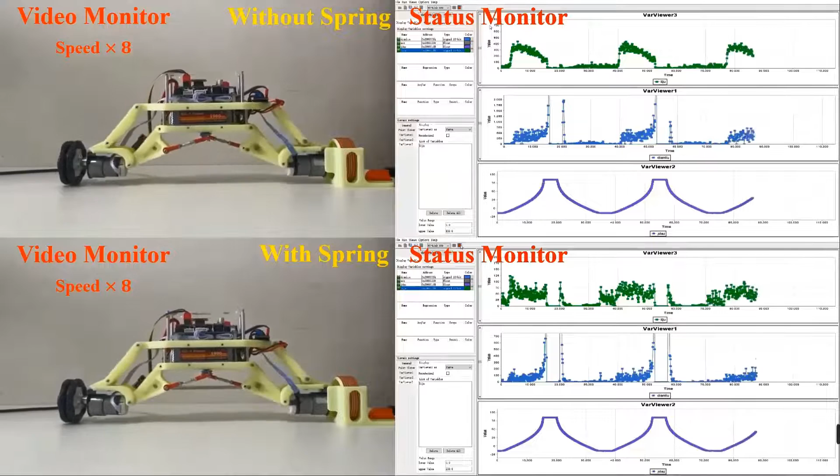And the last one is the comprehensively optimized mechanism, and the driving force and the driving power were further reduced.

And by reconfiguring the moment of inertia, the robot can stand up by itself.

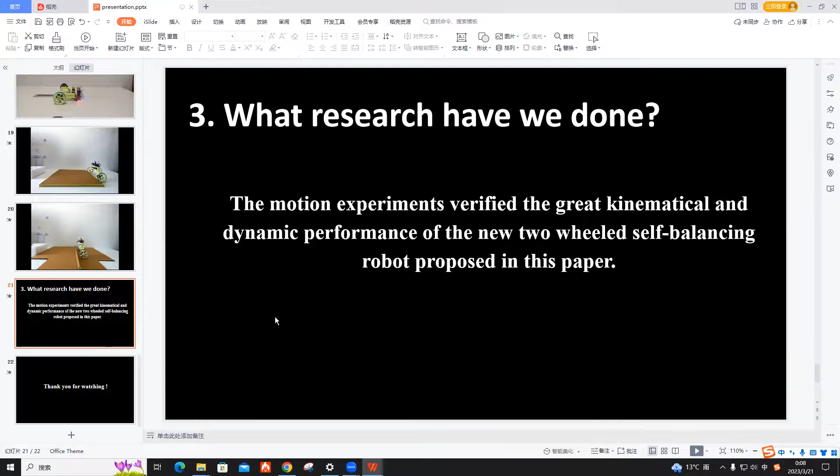And finally, that's the conclusion. The motion experiments verified the great kinematic and dynamic performance of the new two-wheeled self-balancing robot proposed in this paper. That's all, and thank you for watching.